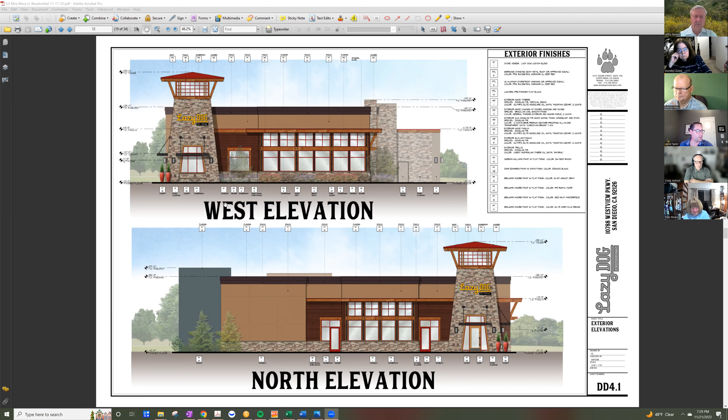So this location to us is fantastic. Mimi's did very well for many, many years. The founder of Mimi's is actually the father of the founder of Lazy Dog. It's the Simms family, so it's a little ironic.

And we're actually tearing down a few Mimis around the country as their leases run out and building Lazy Dogs in their locations. So we're really looking forward to coming to the community.

So my name is Jared Taylor. I'm the applicant. I also have Dwayne Mitchell on the line here with us, who's the Vice President of Construction and Design for Lazy Dog Restaurant. And we would be happy to answer any questions that you may have.

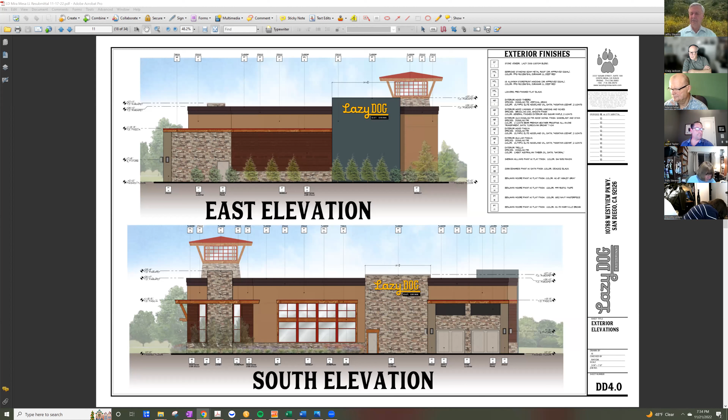So I noticed there are dog features all around. Are dogs allowed in this or around? So California Retail Food Code has a provision to allow customers to bring their dogs onto the outdoor restaurant patio. And so this is something that we do in all of our locations throughout California and really throughout the country. And so essentially when a customer brings their dog onto the restaurant patio, they are not allowed to bring it inside. We have a patio gate adjacent to the front door of the restaurant. Here, I can show it to you here.

And it's in your plans set. So here's the front door right here. And then here's the patio gate that takes you onto the patio. The hostesses are trained to look for the dogs, to come out and greet the guest outside, take their name if there's a wait. The guest is asked to wait outside, and then they're brought directly into the patio. While the dogs and their owners are on the patio, it's not a doggy daycare. You're still responsible for your own dog. Any biting, bad behavior, and so forth, we will kindly ask guests and their dogs to leave.

But this is something we do throughout the country with quite a bit of success. People really like to bring their dogs to the restaurant, to have them on the patio, to see other people's dogs, and so on and so forth. Part of the restaurant menu, there is a doggy menu as well, where you can order chicken and rice for your dog, which will be provided in a single-use disposable container to you, the human, and then you feed your own dog, because you're still responsible for your own dog, as well as to pick up after your own dog. There's a doggy waste station provided with bags for you to clean up after your dog if needed as well.

Do they all have to be lazy? They can be lazy if they want. The lazier the better, because they're hungry dogs too. So we get to sell them a lot of chicken and rice. It's amazing where, you know, at the end of the day, dogs are man's best friends.

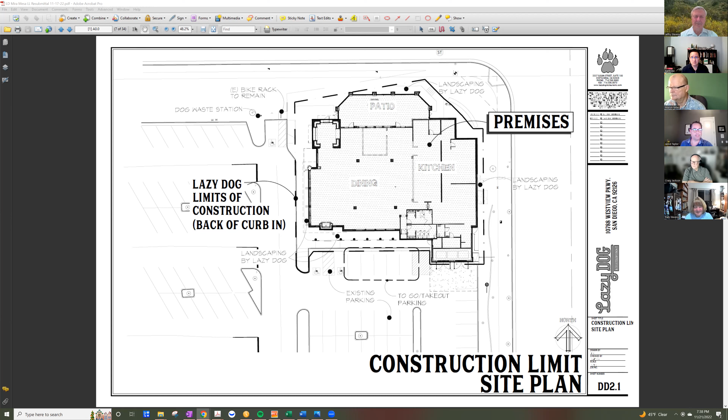Thank you for having me. Hang on a minute, I'd like to share my screen. All right, hopefully you're seeing the PowerPoint. Thank you for having us. My name is Louis Schultz, I'm a senior engineer with the City of San Diego Engineering Capital Projects Department.

I have with me Sean Krause, who is the associate engineer and project manager for this feasibility study. I'm here to discuss the feasibility study, talk about where we're at with it, and what kind of findings we've come up with so far. I wanted to start by explaining where the process is right now with the project itself.

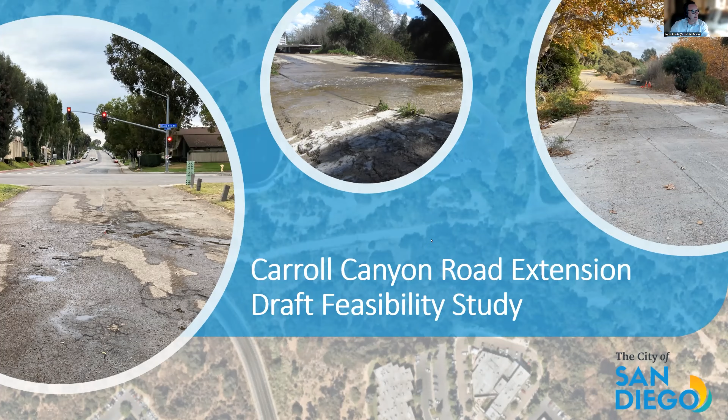This is simply a study commissioned by our traffic engineering department to analyze the potential of adding an extension to Carroll Canyon Road, at the location past where the developers have done some of their work. This study will analyze a portion of Carroll Canyon Road that's currently not connected. As part of the study, it will develop a cost estimate, analyze elements like the alignment, a future alignment for the road, and come up with alternatives for that alignment.

It will take a look at elements that could impact the project, like drainage, environmental concerns, and right-of-way acquisition. That's ultimately the goal: create this study, find these constraints, and once the study is completed, look at the alternatives and analyze which are the preferred version to move forward with. That information will be taken by the transportation department and our planning departments, and analyzed and developed into a project. So I just want to lay out from the beginning what the expectations are for the study itself.

So I have up right now a map of Carroll Canyon Road. There are portions that have been built that are already complete, and 2 portions that are going to be developed by developers, the Stone Creek project and 3 Roots. Both projects are well underway. The 3 Roots portion will extend close to the portion the city is responsible for, which is—hopefully you can see my cursor—the T5A portion, which will extend all the way to where Carroll Road will connect.

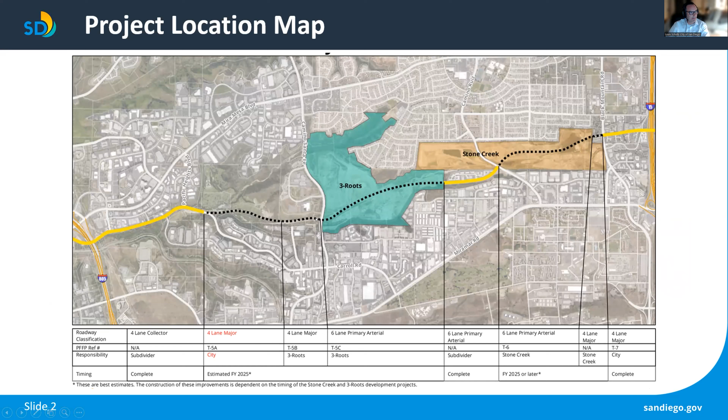Part of the study was to develop a cross section for the future street as we move forward. There is already at the intersection with the 3 Roots portion a conditioned, accepted cross section that we'll be tying into. So the goal of this project is to tie into that cross section, which 3 Roots is already developing, a 131-foot total right-of-way width.

It includes 2 lanes of travel in both directions, 2 11-foot lanes, a large bike facility which will likely become a cycle track type protected bike facility, one way in each direction, and pedestrian access with 5-foot sidewalks and a parkway. As part of this project, we're also accommodating a future bus rapid transit in the center. That was established as part of the 3 Roots project, that it would be in the center of the road, and this project has coordinated with MTS and SANDAG so it will accommodate their future plans for the bus rapid transit.

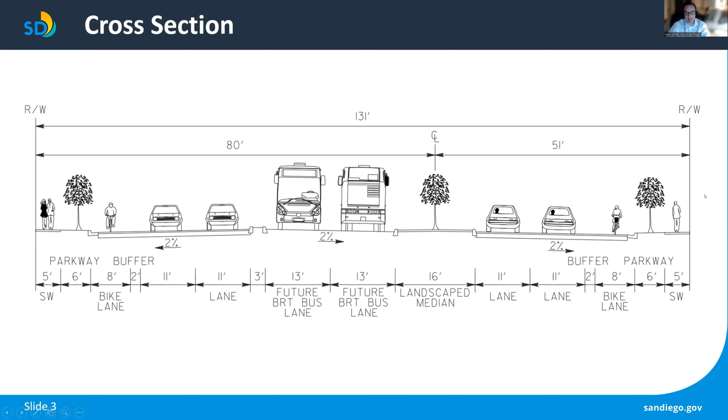So this is the cross section currently being analyzed. From an alternatives point of view, the project came up with 3 alternatives that look at the horizontal alignment of the street - what it will look like from a satellite view. There came up with 3 different alignments, generally impacted by the fact that we're building this roadway adjacent to Carroll Creek, which is part of a floodway, and that flood event has to be accounted for as part of the road.

So much of the alternatives was dictated by how do we cross Carroll Creek with the roadway and bring it to its outlet point to the west of the project. The project also addressed some flooding that takes place currently on Carroll Road, to improve, remove, and mitigate that flooding that occurs today.

So let me start with alternative 1. The first alternative proposed using a box culvert in order to direct the creek underneath the roadway. In doing that, it keeps the roadway to the north, eliminating some extra horizontal curves which would be required if we accommodated the flood to the north or south of the roadway. You can see here in light blue where the box culvert is going to be located. This is at this location, Pacific Heights Boulevard.

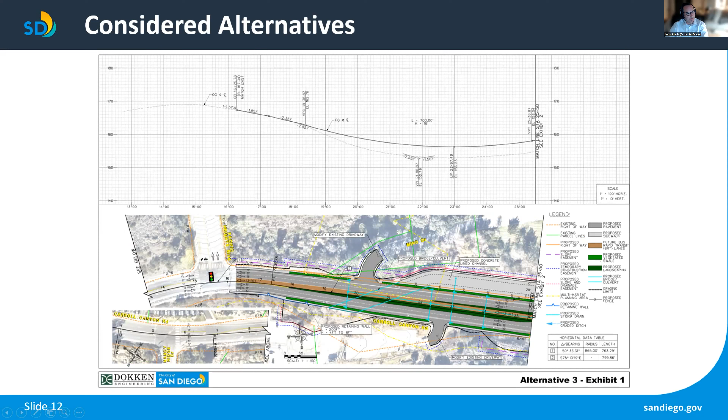The third alignment deals with the floodway in a different way. It pushes the floodway up to the north of Carroll Canyon Road and utilizes an open lined channel to carry the floodway, then brings it back underneath via a bridge or box culvert to the south. You can see it running along the north of the proposed road. It changes the alignment a bit because we have to push south to move away from the mortuary to the north. The advantage of this is much to do with maintenance - without a box culvert, it's easier to get access to this facility.

There's less chance for debris and things that need to be cleaned out, a box culvert is much more difficult to clean out. So this was another version. After you get past the floodway portion where it crosses, the alignment goes back to a very similar alignment to all the other versions we've been looking at.

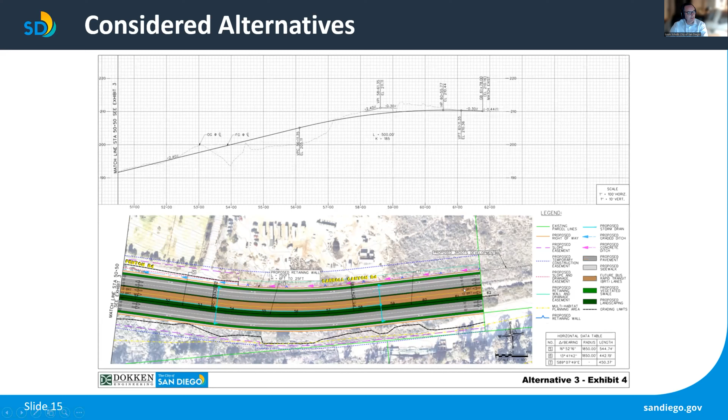The study also looked at stormwater treatment. Because this is a brand new roadway, we'll have to meet the full requirement for stormwater treatment, which means we need to detain a certain level of storm for hydro modification so we don't damage streams downstream from our project. So this project will incorporate vaults underneath the road to accommodate that storm event.

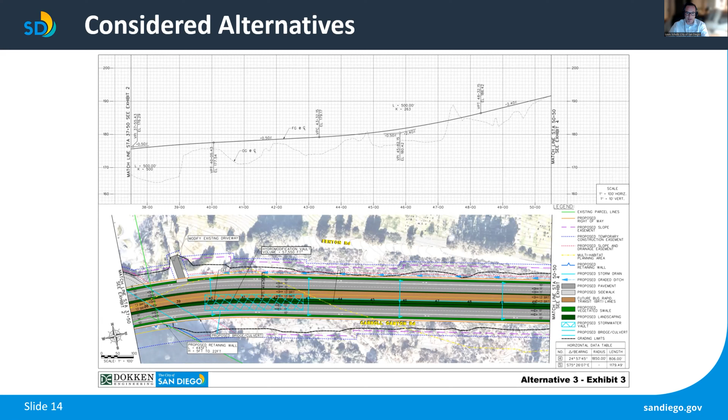There was a desktop analysis of the geology in this area and the environmental impact of building the roadway, taking that into account for developing the cost estimates for the work that needs to be done.

Probably one of the most important things this feasibility study will come up with is the ultimate cost for the project, which will help in programming the project so we can hopefully take it to the next stage of becoming a CIP. All three alternatives ended up very close, right in the $52 to $53 million range.

Moving forward, once the study is finished, we anticipate that if we don't get comments that require a lot of rework, we could probably finish this study up in December coming up.

And move the study to the next phase, which would be providing it to the planning department, our sustainability mobility department, our transportation department, facilities financing, so they can use the information the feasibility study developed and hopefully develop a future CIP project. After that, the next phases would be to enter into the environmental phase, the early planning stages for the project, early design stages, and then enter into final design and construction. So that's my presentation.

I wanted to open it up for questions and see if you guys have anything you'd like that I didn't cover.

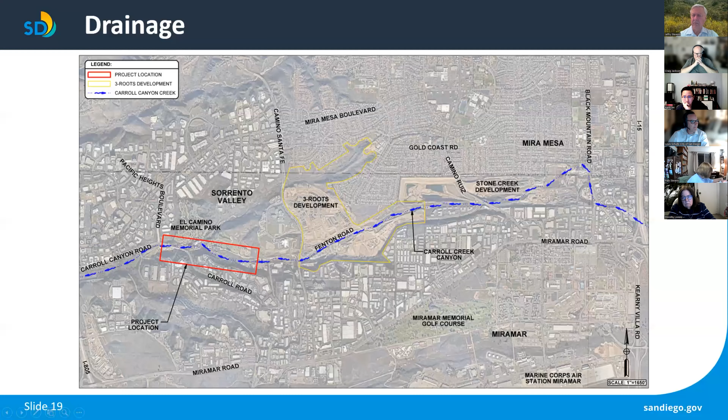So probably the largest disadvantage is that it pushes our alignment to the south. So it results in some larger walls as we push into that geography to the south of the project. It increases some of the horizontal curves as we move that direction.

I think from a maintenance standpoint there are few disadvantages, so I suspect our stormwater department will be very interested in this approach. But I think generally it's the fact that we can't keep the flood underneath the roadway. So by pushing it south, it changes to some extent what that impact is to our roadway's geometry.

And the impact of that is to slow drivers?

To some extent, I think we want to be careful with geometry when it comes to a large road like this. We want to keep our sight distances as open as possible. I think it could have some impact on slowing drivers, but this is a fairly major roadway classification, so generally we want to stay within certain limits. I think this still keeps within the limits of our design standards.

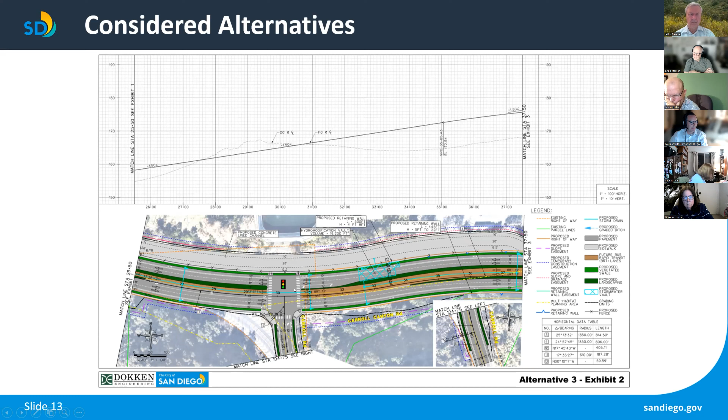For our project, the original scope was to stop here at Carroll Road, but we extended the study all the way to Pacific Heights for two reasons. One, we knew there was flooding and some substandard conditions on Carroll Road to the west, where you can see a concrete portion that allows flooding to come over the road, so we wanted to correct that. Plus we wanted better follow-through with the BRT to extend it through the intersection. I believe there are plans for the BRT to continue all the way to 805, but the feasibility portion of our project stopped here as a logical place for the study itself. When the actual BRT project comes through, there could be more options.

Okay. Other questions?

Could you send me a copy of your presentation? I sure will. Thank you. Okay, so we're all anxious to see this. Whatever alignment you like best, I think is probably okay with us.

One thing we were hoping for is that, since the feds have their big infrastructure program and the state has similar programs, we could get some state or federal money for this. Our concern was that this study takes long enough that those opportunities go away. Any comment on that?

No, I think the study is very close to being finished at this point. The consultant has produced it and submitted it to the city. There's probably going to be a comment period back and forth, but I expect that to be short. I think having the study available, with an established alignment and understanding of the cost, will go a long way toward being able to draw funding and be ready when it's available. So I believe that at least the very first part of next year we will have the study complete and we'll be programming a project at that point, or at least leading toward a project. I'm not exactly sure what that process looks like, but from the study standpoint we're very close to being finished.

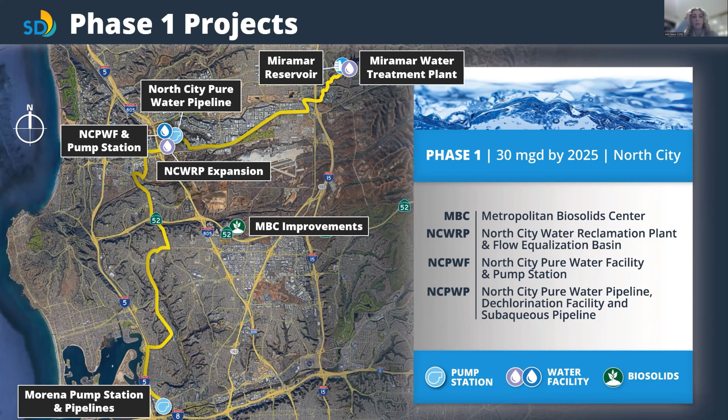So basically, this is an overview of the entire project. Now I hand it over to Clem to go more specific about the North City Pure Water Pipeline project.

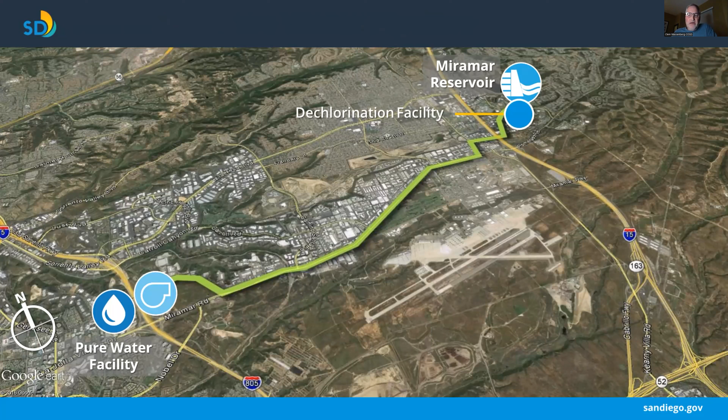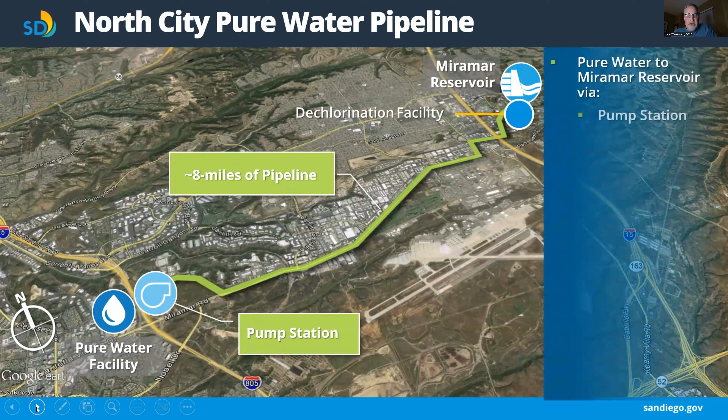Here you'll see a close-up of the alignment of the North City Pure Water Pipeline. It will essentially transfer the water via the pump station through the alignment going from west to east: Eastgate Mall, Miramar Road, Kearny Villa Road, then in the business district, Candida Street, Via Pasar and Via Excelencia. From there, we're tunneling under the I-15.

We're coming out on the other side on private property. From there, we're following Business Park, Carroll Canyon Road, and Scripps Ranch Boulevard until we turn onto Hoyt and Meanley. From there, close to Evans Pond, our pipeline is going to be tunneled via an access shaft built on the property of the city's water treatment plant. Another tunnel will extend the pipeline into the Miramar Reservoir.

The second part of the North City Pure Water Pipeline is the subaqueous portion, which will disperse the water into the reservoir. So like Azin said, the North City Pure Water Pipeline is a 48-inch diameter welded steel pipe, about 8 miles long.

Currently the contractor is working in multiple locations: one on Miramar Road, one on Carroll Canyon and Scripps Ranch, and various tunneling locations are ongoing. We started construction in spring of '22, and we anticipate completion about the same time as the other projects in this phase 1, around 2025.

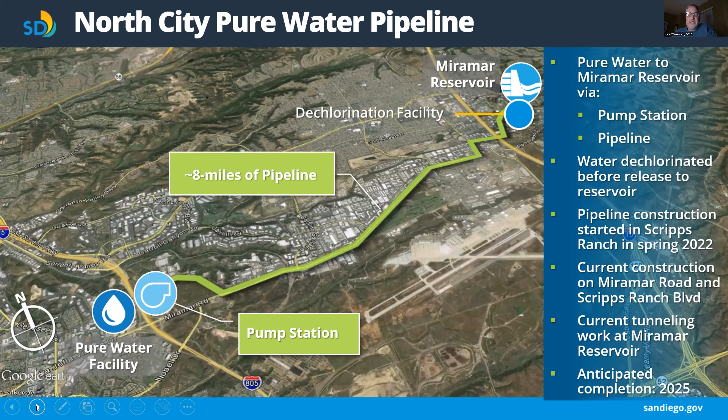Okay, here's a little more of an overview of the subaqueous pipeline. The green is the tunnel exiting into the reservoir. From there, the subaqueous pipeline, best described as a Christmas tree of HDPE pipe with a thicker trunk and narrow branches, will be floated on the reservoir and then sunk to the reservoir bottom, where it disperses the water.

Most of the construction of the actual pipeline in the public right-of-way is done at night. The work around the Miramar Lake happens in the daytime, Mondays to Fridays. The downside is while we're installing the pipe, floating it on the reservoir, there will be no boating allowed. However, shore fishing is allowed and the trails will be open for use.

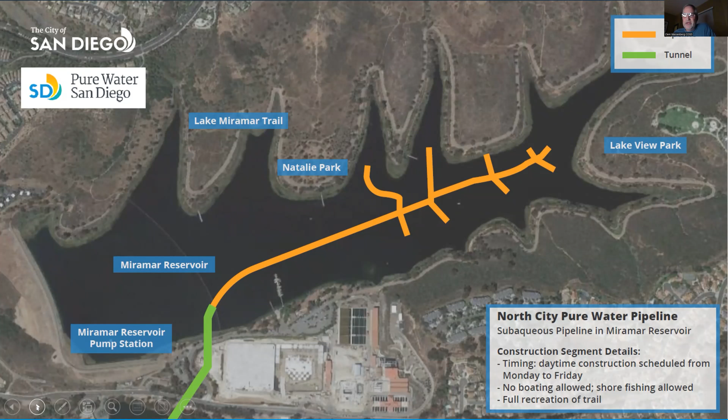Thank you. Here's a bit more detail for those of you that travel on Miramar Road—you might have seen it in the evenings. Our contractor is currently working just west of Black Mountain Road. He started there, working his way towards Padgett Street and Clayton Drive/Mitscher Way to the main gate of the Marine Corps Air Station.

This is night work. The contractor starts setting up traffic control at about 7 p.m., and we're working until 5 a.m. It takes the contractor a little while to set up, so you'll see equipment moving into the street just before 9 o'clock roughly. While we're doing construction on Miramar Road, it remains two-way traffic with one lane in each direction open. The lights are set to flash to slow traffic for public and worker safety.

You will see this construction after this first phase is completed, with construction moving from east to west along Miramar Road. Can we go to the next slide, please?

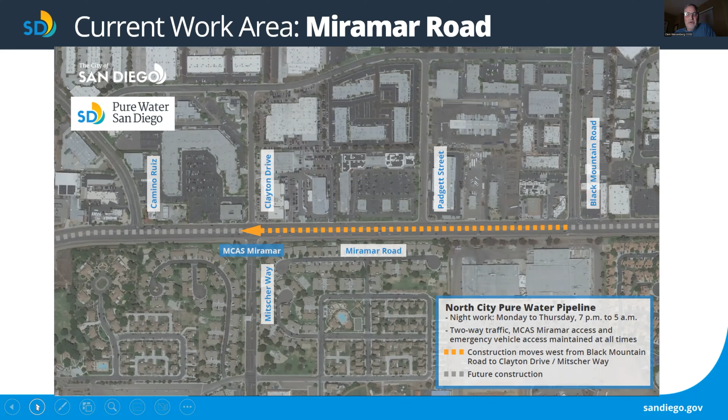Again, the contractor has elected to work four 10-hour shifts, Monday through Thursday from 7 p.m. to 5 a.m. Currently from Black Mountain Road on his way to Clayton Drive, one lane is open. Access to the Miramar Air Station remains, and emergency vehicles will of course have priority, so our contractors have to make sure they're not blocking or impacting them. Driveways to businesses remain open as well. So when you travel on Miramar overnight, please allow some extra time and drive carefully.

Construction equipment, the heavy tracked equipment, will wherever possible be staged on the raised median on Miramar Road. In other locations it will be staged on side streets, along with most of the material, pipes, and stockpiles that the contractor needs for construction.

As a result of the construction, you will probably notice trench plates on Miramar Road. That's just for those sections where the contractor has installed the pipe but needs to go back in, weld the joints together, and finish up the joints before everything can be backfilled and the roads restored. So for a certain period there will be trench plates and also some cold mix, which is temporary. The road will be bumpy before we go back and trench pave to make sure the road is smooth again.

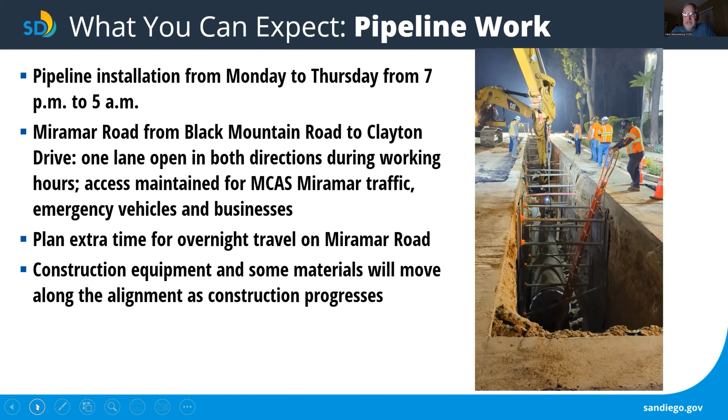Can you go to the next slide please? Here is the other work location we're currently working in. The contractor has installed the pipe from Carroll Canyon and Business Park up to almost Hoyt, so most of this pipe has been installed. We just have to finish up some utility relocations before we can finish this phase. Then the contractor is going to move back onto a segment of Business Park that he has to finish up, and also continue working up on Hoyt.

Again, this is night work, so the contractor sets up his traffic control at 7 p.m. and works until 5 a.m. in the morning. Can I ask a question on that particular section of the road?

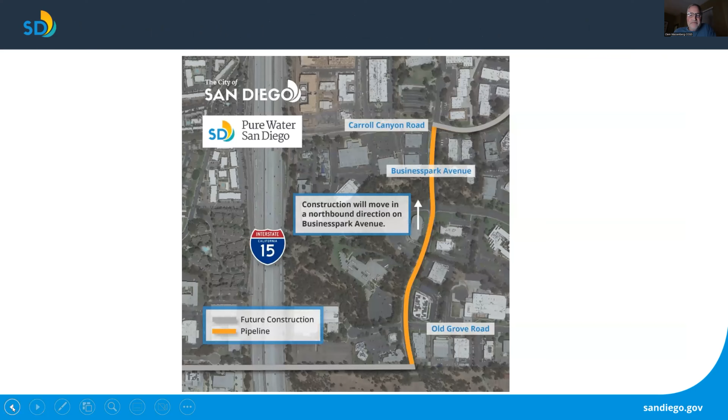Sure, can you go back? When are they going to finish it? That is the bumpiest, crappiest road I've ever seen. I don't know if it's in the process or waiting to be done, but I come down Scripps Ranch Boulevard and go down Carroll, and I'm telling you, it jars my car. That's the lane on the right-hand side. So if you can tell me they're going to come back and make it nice, that'd be great.

Yeah, that will happen soon. We have one more water main relocation to do, scheduled for the week after Thanksgiving. And when that is done, we're going to start the restoration of the trenches.

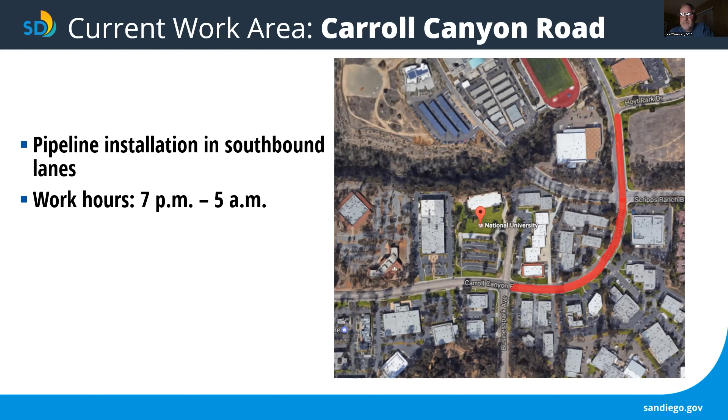This segment shows Business Park. The northern portion of Business Park is one of the next phases where the contractor is going to go after he's done with Carroll Canyon and Scripps Ranch.

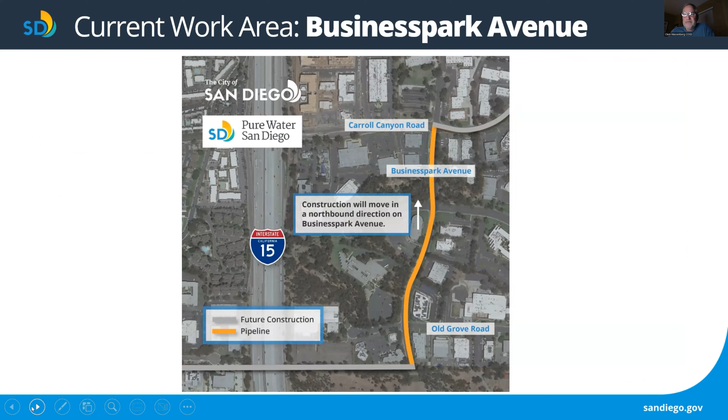And then I believe both are available to answer any more questions if anybody has any.

Yen, it's Marv Miles again. Clem, I have a question regarding whether you've come to an agreement with the city and Murphy Development on going across their property to get the pipeline over to the lake. That segment of pipe on the Murphy property has been installed already. And you've obviously come to an agreement on that. I can't speak for that, but I believe the city came to an agreement with Murphy. I wasn't part of that, but since we got the go-ahead to install the pipe, I assume that happened.

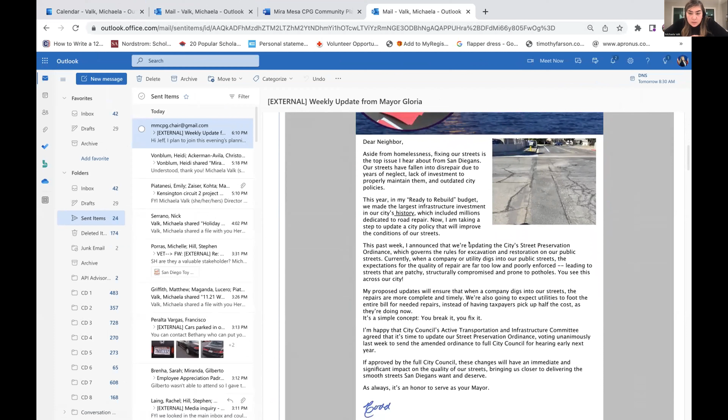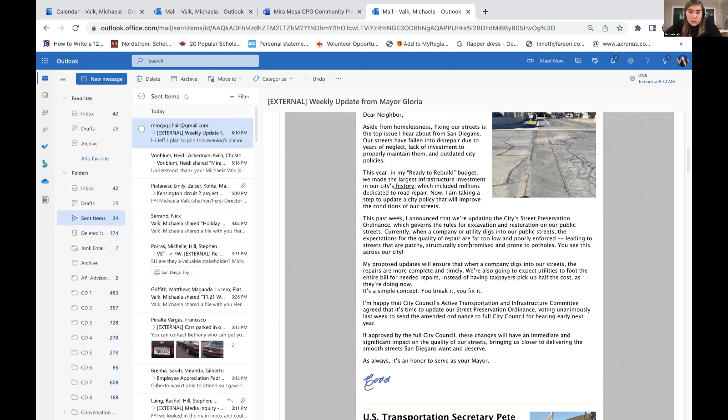I'll start off with the street preservation ordinance that the mayor introduced to the Active Transportation and Infrastructure Committee last Wednesday. What it does is better define the trenching and the responsibility for utility companies after they do their work. This includes defining major excavation as a trench greater than 6 inches wide and greater than 3 feet in depth. It will require trenching and restoration to be completed within 180 days, and adjust the street damage fee to ensure the public is made whole for the total cost of damage and reduced service life. Sometimes the trenching that happens either gets abandoned or there aren't enough funds for the city to come back and make it whole. So this street preservation ordinance will address that.

A lot of heavy hitters last week. Secretary Pete Buttigieg did go to the new Otay Mesa border, kind of what Jeff was talking about earlier with Carroll Canyon Road. The mayor has been making sure we use our federal and state relationships to advocate for infrastructure dollars. While we did see the state may be more conservative in the next coming year as they foresee a recession, we haven't gotten that announcement yet from the federal government. So that's why it's important that we complete the Carroll Canyon feasibility study as soon as possible, so we can start advocating for more infrastructure dollars to complete projects like that one.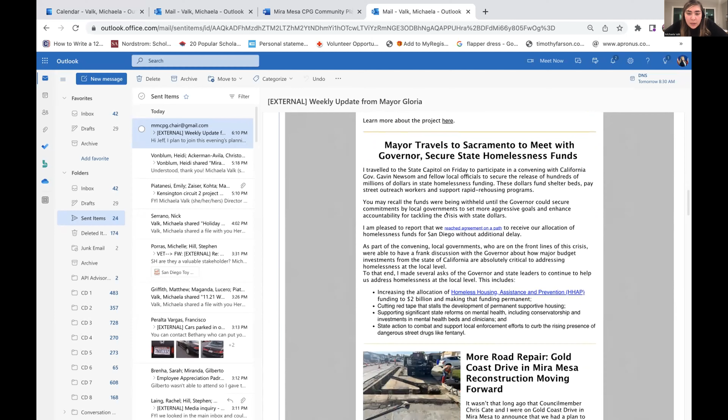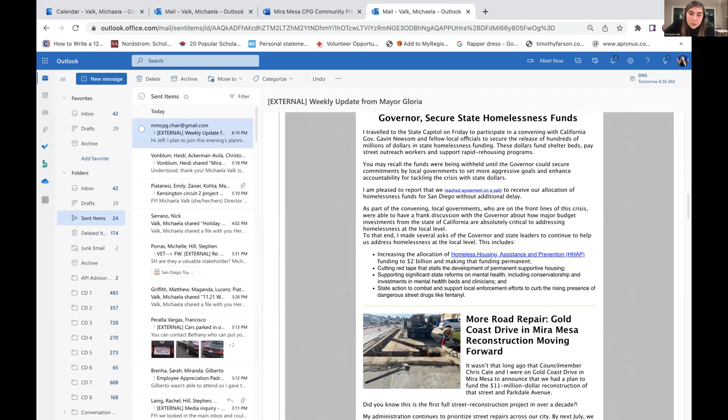The mayor did make his way to Sacramento to talk about homeless funding. The allocation of some funding had been halted, so all mayors across the state met with the governor to talk about their regional plans and how to increase shelter beds and housing programs.

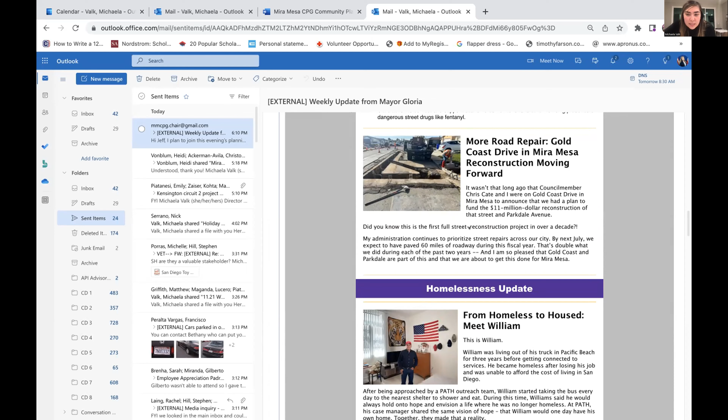Here you'll see the spotlight on Gold Coast Drive, where we joined Councilmember Cate, Councilmember-elect Kent Lee, as well as Jeff, Joe, and Barry on just prioritizing road repair, especially for Mira Mesa. You'll see that highlighted there. We include our homeless updates.

Last but not least, I'll scroll down to our Mayor for a Day contest. Last year's Mayor for a Day was from Mira Mesa. Who knows, maybe we'll get another Mira Mesa kid again. But please tell your friends and family, as Thanksgiving comes up as well, any kids K through 12th grade can apply for the Mayor for a Day contest by writing an essay or submitting a video on what they would do if they were mayor for a day. The deadline is December 5th. They can just click this link here and submit it. So you should all get that. There's a way to subscribe in case you want to receive those weekly as well.

I think I covered most of it. I'm happy to answer any questions. Thanks, Michaela. Are there any questions?

The Carroll Canyon Road costs, I think the first number we heard out of the feasibility study was $30-some million, and then it went to 40. Now it's 54. Is that just inflation? Yeah, the construction costs are really going up and they're going fast, so that's a result of it. The other big thing was, as mentioned, the stormwater requirements and the flooding that was unexpected in the beginning of the feasibility study. That added costs as well.